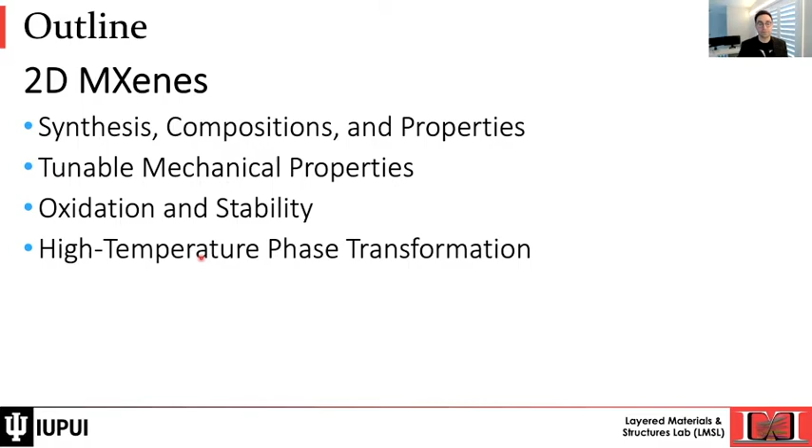And at the end, I will also talk about the high temperature phase transformation of MXene. Something that people say: well, if it gets oxidized at room temperature, how is it even possible to be stable at high temperatures? So first, let's start with MXene.

For those of you who do not know about 2D materials -- though I'm sure you're all familiar, being here in this webinar series -- 2D materials all started from graphene, and really the boom started in 2004 and after, and now we have a whole bunch of different families of 2D materials. One of these families of 2D materials is called MXenes.

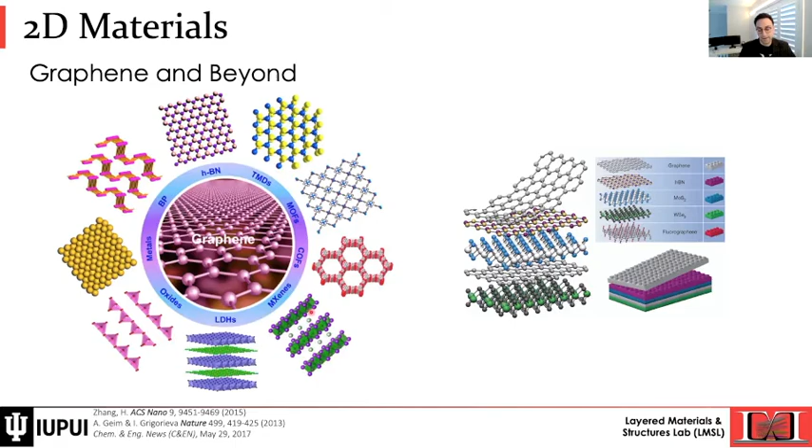MXenes are 2D transition metal carbides and nitrides. If you look at the periodic table of MXene, you see that we have all the early transition metals, group 3 to 6 of the periodic table, marked as green. These are the transition metals that can be in the structure of MXene.

We can have 2, 3, 4, or 5 layers of the transition metal atomic layers, and they all have carbon or nitrogen -- that's the X in MXene -- between these layers of transition metals. Because we have transition metals on the surface, we have dangling bonds that can bond to species available in the environment, forming surface termination, shown as Tx in the MXene formula. Usually these are oxygen, hydroxyl, or fluorine and chlorine because of the etching environment, and more recently you can have more variety of surface terminations.

This is how MXenes are synthesized. They are done by top-down synthesis, so it's not a growth mechanism.

First, we need to synthesize the precursor of MXene, usually called MAX phases, which are ternary carbides and nitrides, where we have these 2D layers bonded with a layer of A group elements, such as aluminum, silicon, and others. Because aluminum, silicon, and these A elements form a metallic bond, we cannot do mechanical exfoliation. That's why we need to do selective etching, and I will explain how. By doing that, we can make MXene.

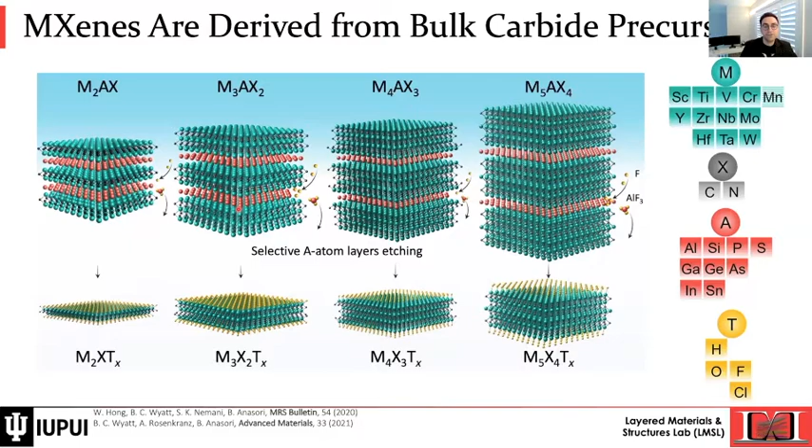So first, how do we make these precursors? The synthesis is important because the way you synthesize the precursor will affect the quality of MXene. I'm going to focus on Ti3AlC2, the precursor of the well-known MXene Ti3C2Tx. To synthesize it, all we need to do is combine the required stoichiometric molar ratio of 3 titanium, 1 aluminum, and 2 carbon as elemental powders you can buy from any chemical company. Then you mix it and put it into a furnace under controlled environment, meaning inert gas at atmospheric pressure, and take it to a high temperature where this phase is known to be thermodynamically stable, and hold it—for example, 1400°C for 2 hours. By doing that, you get this structure by reactive sintering of the three elements.

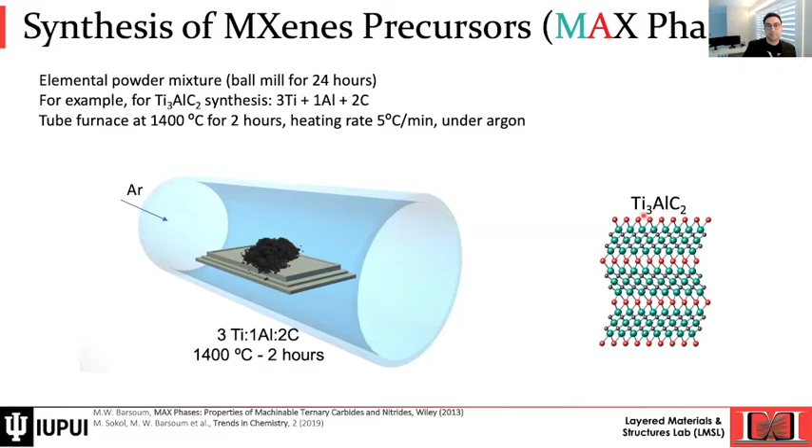These are all layered ternary carbides and nitrides. There are more than 100 max phases that have been synthesized, with a large variety of composition—more than thousands of compositions across all these different layerings of the structures.

When we have these max phases, we place them in a selective etchant—something that has started in 2011 and continued since then—usually a hydrofluoric acid containing solution. The hydrofluoric acid will selectively remove the A layer, which is aluminum here. So we put just the powder—you see it's a gray powder of carbide—and place it into the acid.

And this is how the max phase looks like. This is a high resolution STEM image showing the layered structure, but not yet 2D. By removing the A layers, we end up with this exfoliated structure, and you see we have an open structure between the layers, now bonded by van der Waals bonds or hydrogen bonds.

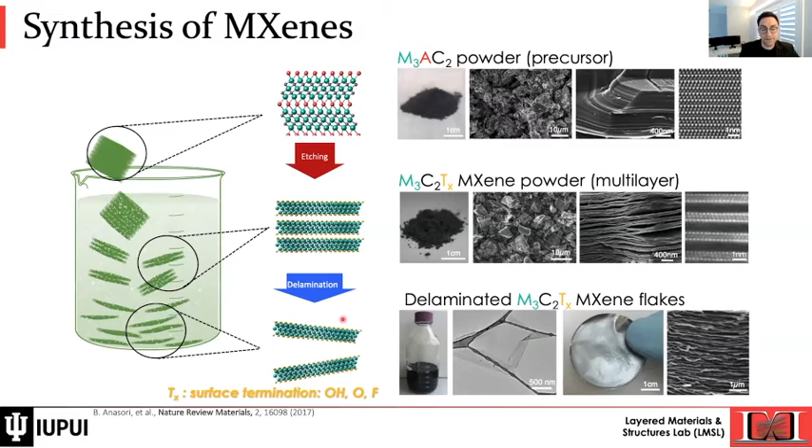Then by mechanical agitation, sonication, we can break these flakes into single flakes and have MXene solutions.

MXenes are among the few in the 2D world that can be scaled up, and that's very important because the synthesis is a top-down method, not a growth mechanism. By just making the reactor container larger and having more starting precursor mass, we can make a larger quantity of MXene film, solution, or powder. And they behave like a clay, so water or other cations can easily integrate into the MXene structure.

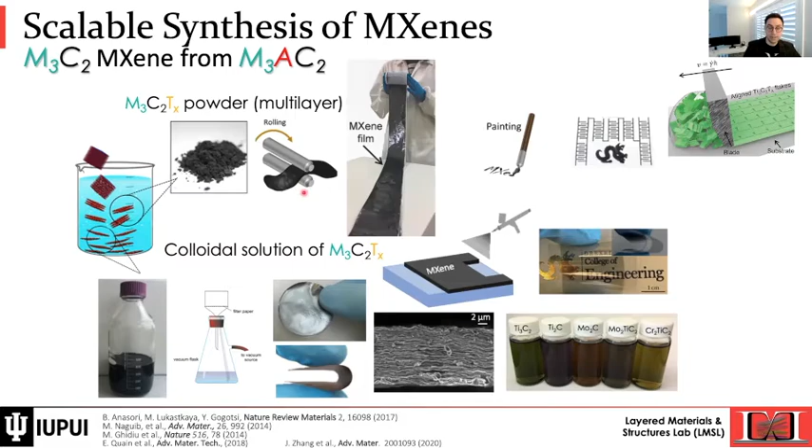So just to wrap up the MXene synthesis and properties: these are basically metallic 2D materials. MXenes have high electrical conductivity—for example, for Ti3C2 film, it has up to 24,000 Siemens per centimeter. They have other unique properties that I'm not going to talk about due to time, but you're welcome to read the papers, or listen to Professor Yury Gogotsi's webinar on MXenes, where he explains all of this very well.

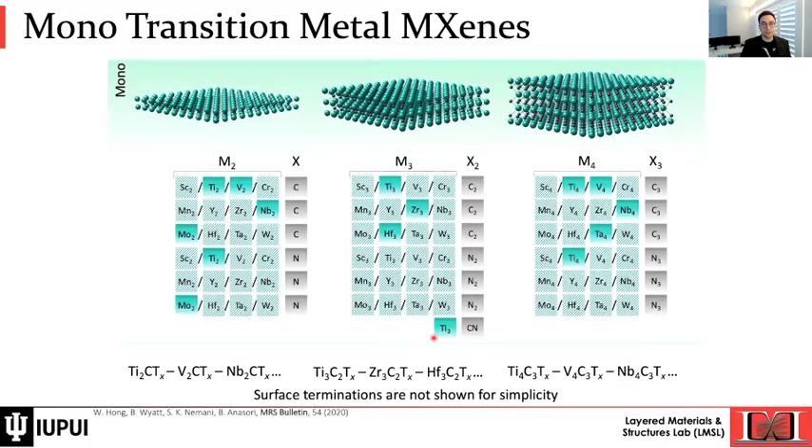Now, MXenes are not just Ti3C2—they can have a variety of compositions. For example, we can have vanadium carbide or niobium carbide, which is important when tuning mechanical properties. We can also have two different transition metals combined, called double transition metal MXenes—for example, titanium and vanadium mixed together as a solid solution. So we can have different solid solutions: titanium vanadium in a 3-layer, titanium vanadium carbide in a 2-layer, or titanium niobium in a 4-layer, and so forth.

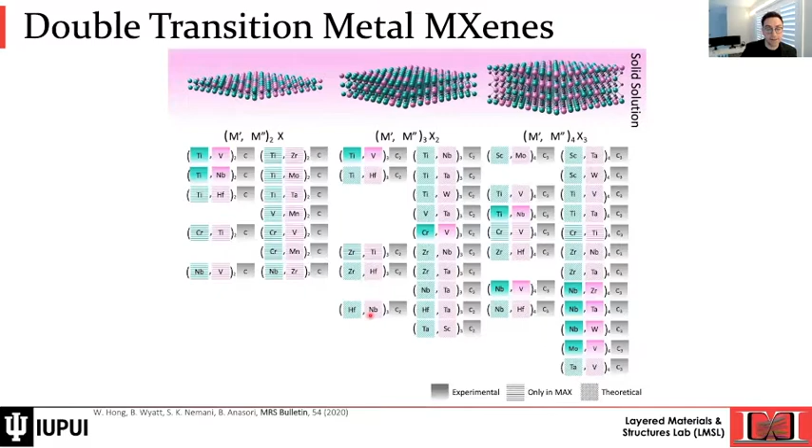A unique feature of the MXene family is that when we mix certain transition metals, such as molybdenum and titanium, or molybdenum and scandium, instead of forming a solid solution as I showed in the previous slide, these prefer to have an ordered structure.

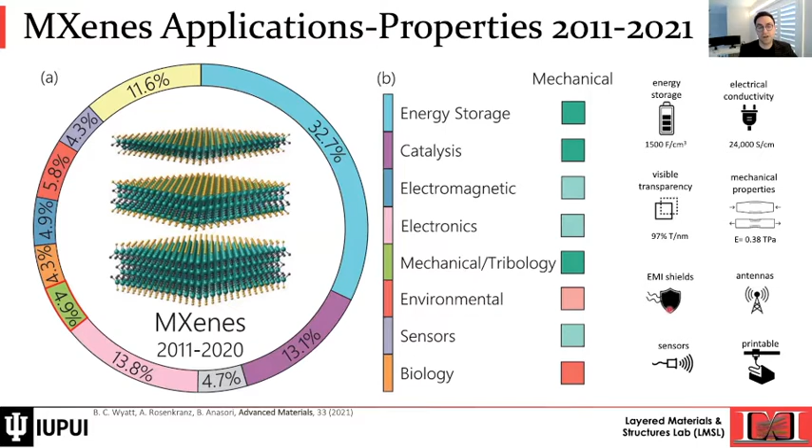And that 5% is not really papers dedicated directly to mechanical properties. We included those that just investigated the mechanical properties of MXene, and they have, as I mentioned, unique properties I'm not going to talk about. So let's move to tunable mechanical properties of MXenes.

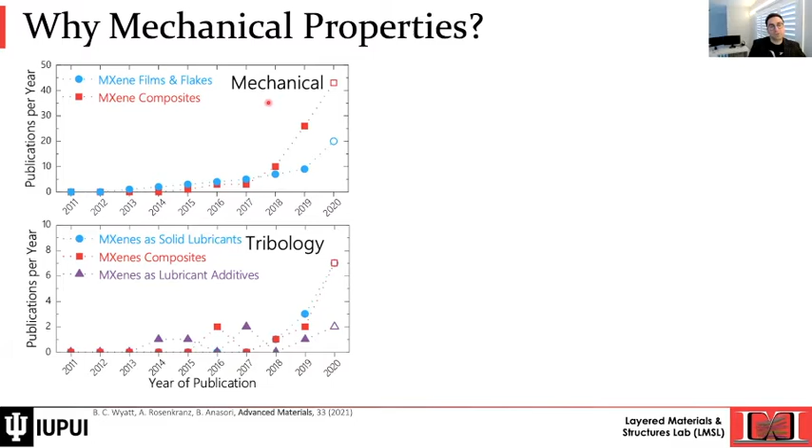Also a big contribution coming from Professor Andreas and his group. Now you might ask, why should we care about mechanical properties? There's only little done on MXenes. As I mentioned, mechanical properties and oxidation and stability are essential for any application of MXenes. So here we just mark the importance of mechanical and tribology properties of MXenes with respect to every application of MXenes being explored.

Obviously we are making a structure, so mechanical properties are important. When you see it is red, it means we think it doesn't have that much importance for that application, and when green, it means they are very important, mechanical and tribology. The rationale behind our analysis is included in the supporting information of this review paper, so you can read it to understand how we came up with this color coding of green and red in terms of importance. So mechanical and tribology properties of MXenes are very important.

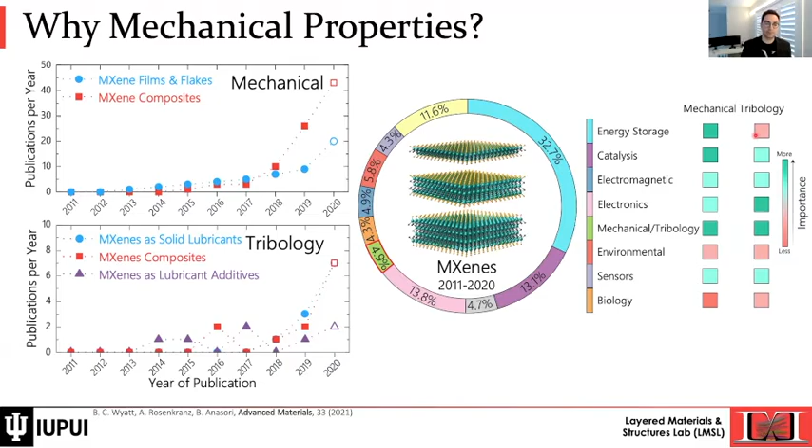Now, how much do we know about the mechanical properties of MXenes? We only know 2D stiffness and also elastic moduli of 2 MXenes only: niobium 4C3 and titanium 3C2. For these two MXenes, the elastic modulus from their 2D modulus was measured, both done from University of Nebraska in collaboration with Drexel University, by AFM indentation, atomic force microscopy. The 2D modulus was measured, and based on the thickness of MXene, the elastic modulus was calculated.

You can see that we are in the 300 to 400 gigapascal range. Now, if you put it into perspective with respect to all 2D materials, MXenes are maybe the 4th or 5th of 2D materials. But if you look at the synthesis route, which is very important, if you look at highly scalable processes, MXenes are the stiffest of solution-based 2D materials, meaning materials you can make by solution processing. So they are the strongest or stiffest of all solution-processed 2D nanomaterials.

Now, what are the key parameters that control mechanical properties of MXenes? Number one, the composition of MXene. As I mentioned, we have a variety of different compositions that we can go from: titanium, vanadium, chromium, yttrium, niobium, molybdenum, all these transition metals. And X is carbon or nitrogen.

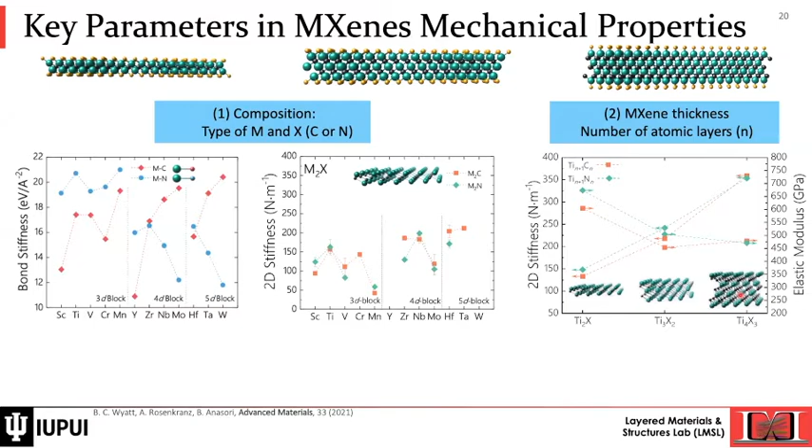Now, you might say, well, usually we're using the hydrofluoric acid route or the HCl/LiF hydrochloric acid lithium fluoride routes, so we don't have control over surface termination. I want to emphasize that we can control the composition, the ratio of surface termination, just by playing with what type of etching route we go.

This is from a study published in 2016 that showed if we use hydrochloric acid with lithium fluoride, which has a lower concentration of HF, we'll have more oxygen on the surface, versus when we use a higher concentration of just HF, hydrofluoric acid, we'll have more fluorine and less oxygen. So just by adjusting the etching solution composition, we can tune to some degree the surface termination.

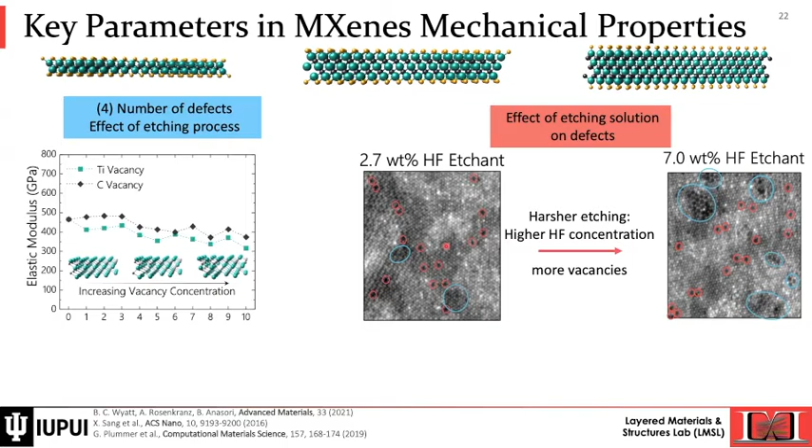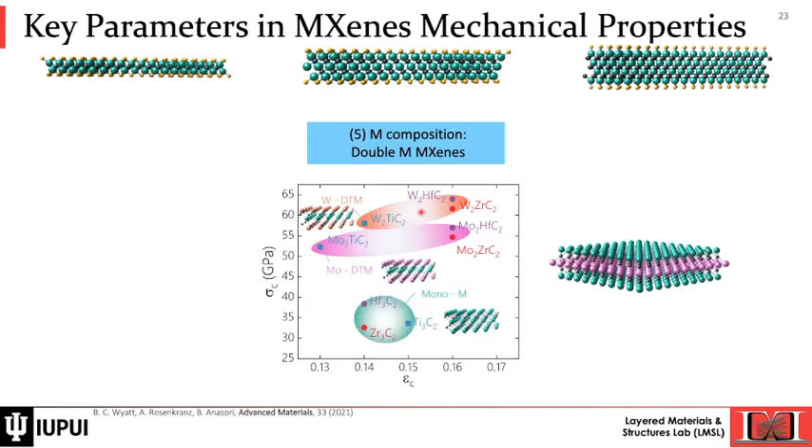Now, these are about a single flake of MXene. You might say, well, single flake is nice, but we work with large quantities of MXene. We make a film. For making the film, all of these variables that I mentioned apply, plus it also depends on how you prepare your MXene film or structure, because these are individual flakes. But if we work at the larger scale, which is usually the level we need, we're not working with just a 1 nanometer flake, we have a stack of these flakes. Then we talk about how we order these layers together.

Here's a nice study published in 2020 that showed how you prepare your MXene film, whether it is blade coating that leads to better alignment of the flakes, versus vacuum filtration. If you use high concentration in vacuum filtration, then the film will be less aligned. The MXene flakes will be less aligned. That will significantly change the resulting MXene properties, for example, tensile strength.

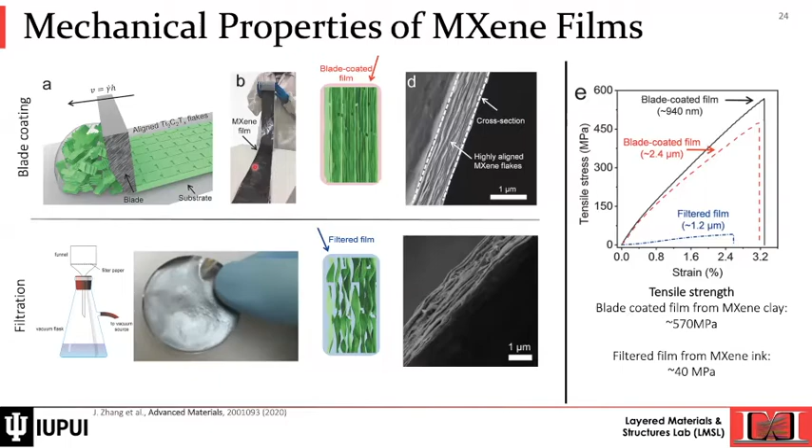So to wrap up this section of my talk, MXene mechanical properties are tunable, and we have several knobs to play with to control them. It can be how we synthesize the precursor, how we synthesize the MXene with different etchants, the number of defects, even the nature of the A group elements we synthesize, surface termination, thickness — all of that will lead to tunable mechanical properties and tunable tribology properties.

As I mentioned, this was more of a review, so you can find all the references in our review paper that I mentioned as a reference in this slide.

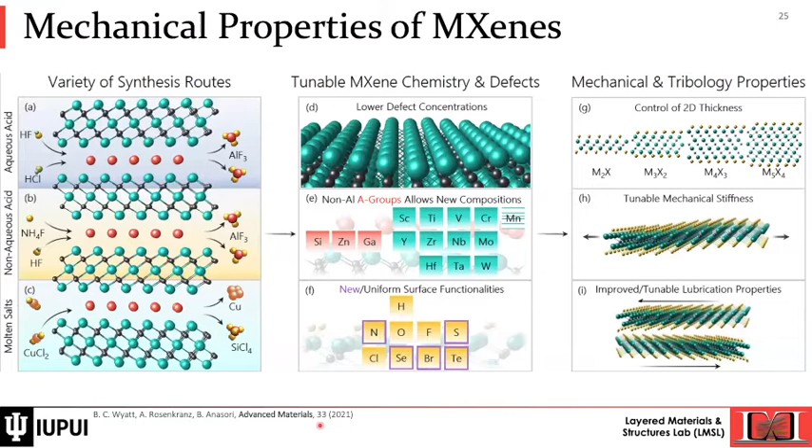Moving forward, MXene oxidation and stability. As I mentioned, mechanical and tribology properties are one thing for all applications, but stability of MXene is essential for any application that you want to claim you are using MXene for. Anyone who works with MXene knows that when we synthesize it in aqueous solution, it gets oxidized rapidly. So it is important to prevent or slow down oxidation. Otherwise, the material we are characterizing is oxides, not carbides.

Before I talk about MXene oxidation, I want to emphasize, as general knowledge, that the stability of any phase depends on many parameters: its composition, number of defects, environment, temperature, atmosphere, and many more variables. Also, bulk carbides get oxidized too. So it is not only MXene that gets oxidized. This is something I want everyone to understand.

For example, titanium carbide is known to be extremely stable. But there are studies, maybe very few, that show that even TiC at room temperature in water can form oxides up to a few atomic layers. That's why the general knowledge about TiC and other carbides is that they are stable at room temperature or in water. But the reason for that is, before the 2D materials era, we were looking at bulk materials, and no one really cared about 2 or 3 layers of atoms. That's why they were called highly stable.

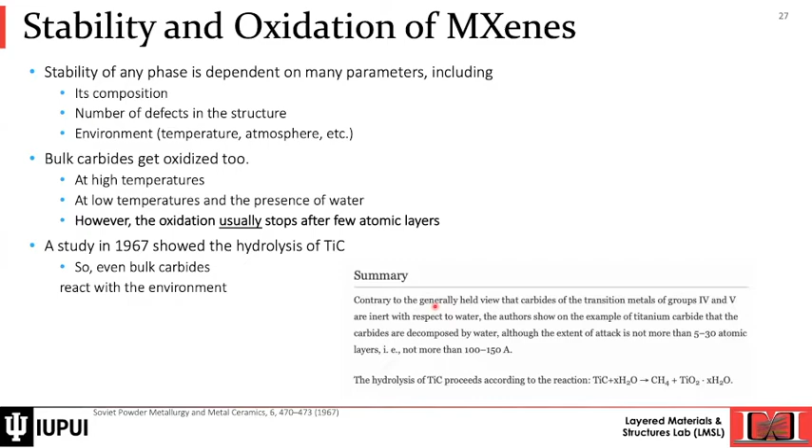For this part of my talk, I am going to go over many of these extremely useful papers that I put here, and I will mention them as my references. None of these were done in my group — these are all done in other research groups at different universities, but I found them very useful when looking at MXene oxidation and stability.

So first, when we put MXene in water, which is how we synthesize MXene, it usually reacts with water and turns into TiO2 and also methane.

This is really the result of the great work of Professor Vadim Mochalin of Missouri Science and Technology, who explained how this phase transformation happens. Here we show basically a synthesized MXene film, and after aging 5 weeks in water in a refrigerator at 5 degrees Celsius, and 10 weeks. You can see after 5 to 10 weeks, almost everything turns to TiO2. Here's a schematic that I got again from Professor Mochalin's paper showing that MXene goes from MXene flakes to TiO2, almost all TiO2, maybe some carbon covered around it.

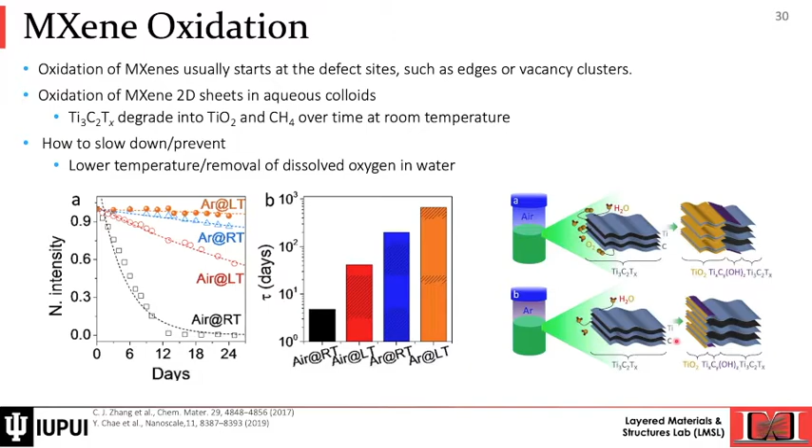The next way to protect MXene is to freeze the MXene aqueous solution. This is another study published in 2019 that clearly showed that if you store MXene solution frozen, either in a regular freezer at minus 18 to 20 degrees Celsius, or in a minus 80 degrees Celsius freezer, you can keep MXene almost stable up to 5 weeks or 10 weeks. Here you see the MXene in the fridge at 5C, where almost everything turned to oxide. And here you can see that the ones kept in a freezer were both stable.

Also, another way is just to remove the water. If you remove the water, this study showed that if we disperse MXene in isopropanol, even with oxygen present, it's stable. Here you can see this is MXene in isopropanol with oxygen, that up to 30 days there is almost no change of properties. So that's another way to control MXene oxidation - change the solution from water to isopropanol.

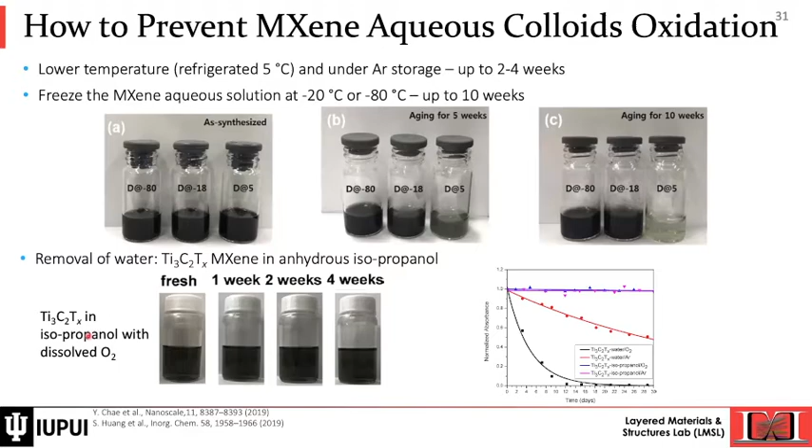There's another study from Drexel, from Professor Barsoum's group, that showed MXene oxidation starts from the edges, as we briefly mentioned previously - that's the defects area. So if we can protect the edges, then MXene oxidation will be prevented for a longer time. Here you can see this is a MXene flake in TEM after storage, where you can see all these black dots are oxide nanocrystals forming.

And here's the one that was capped. Edge capping with, for example, only 0.1 molar of polyphosphates, will attach to the edges of MXene and stop the MXene oxidation. This is MXene after storage with edge capping, showing no oxidation.

The other method came out from Drexel, from Professor Yury Gogotsi's group, who showed that if we modify the MXene precursor synthesis route, we can significantly improve the stability of MXene Ti3C2, up to 10 months. The way they modified it is very clever and simple: if you change the stoichiometric ratio of 3 titanium to 1 aluminum, 2 carbon, and add twice the moles of aluminum as needed, the precursor will have fewer defects in the structure, and fewer defects in the precursor means fewer defects in the structure of MXene, increasing its shelf life.

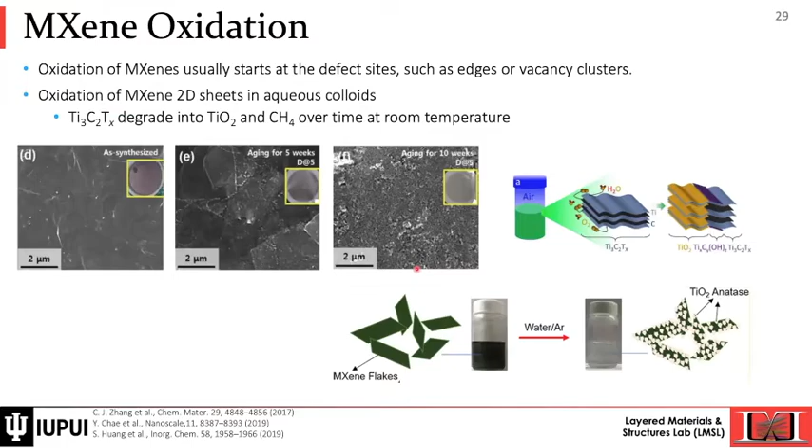You can see this is something expected after a few days of regular MXene, and this is what happens if you use the excess aluminum route. So a clever way to modify the precursor, something that almost no one expected to happen, but it's really working very well.

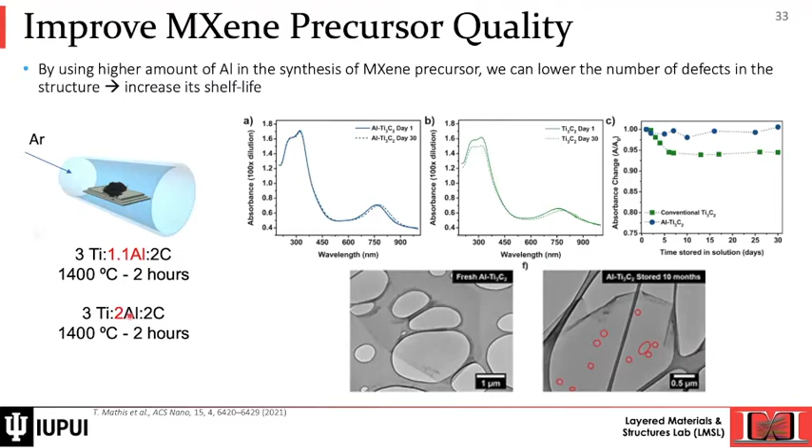Now, all of these that I mentioned were all about Ti3C2 stability. If we work with other MXenes, because they have smaller flakes, more defects, and we have not really mastered the synthesis route of other MXenes, they're more defective, and some of them are thinner, which means they will be oxidizing even faster.

Here's a Ti2C. After 1 day in colloidal solution, it is gone, oxidized and gone.

Here's a V2C AFM that you see that after storage, the flakes will turn to oxide. So here is the MXene flakes, and here you do not see the MXene flakes because they're all covered with oxides and turn to oxides.

Here's the MXene film, and these are again the result of work from Professor Beidaghi's group at Auburn University, that showed the fresh MXene film.

V2C, even if you keep it in film, let alone the solution, after 1 month of a MXene film, it will oxidize so much that the film will deform, something that you do not see with Ti3C2. So some MXenes, such as these, are even unstable in a dry form.

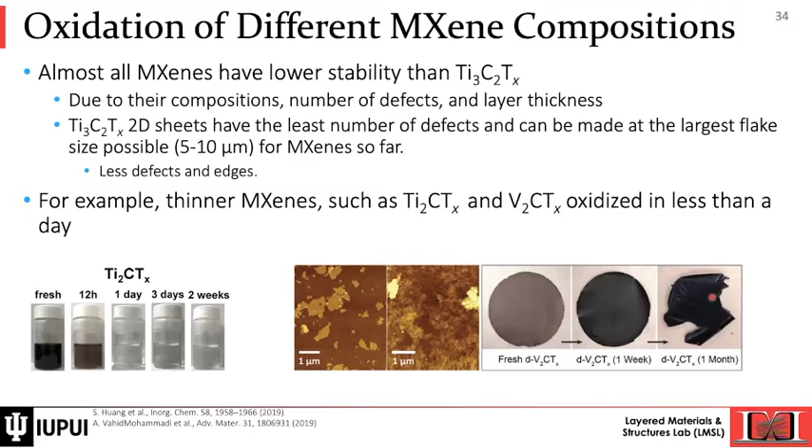How can we prevent these? A method that first started from Auburn University of Professor Beidaghi, and now also a recent study coming from Drexel University, Professor Yuri Gogotsi, showed that by addition of lithium chloride salt to MXene solution, even if it is V2C, the least stable MXene, we can create flocculation, and that will lead to improving the stability of MXene.

So these are the methods that I just wanted to summarize for everyone, that we can control MXene oxidation, whether it is removal of oxygen, change of solution, or modifying the synthesis route, or addition of different salts by edge capping or by creating flocculation.

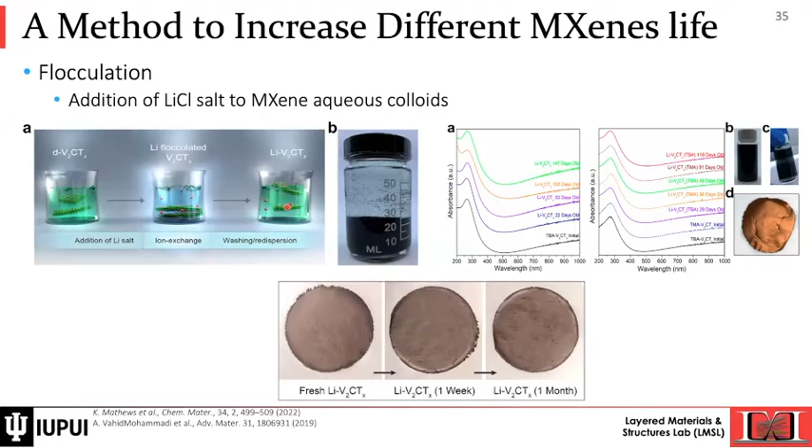Now, moving to the last part, and I'm going to be very fast on this part because it is not relevant to the topic of tribology, but it is important to emphasize that MXenes behave like almost every carbide. We just talked about MXene getting oxidized by just a few days of storage in air. Now I'm going to shift gears and talk about how MXenes can be used to make ultra high temperature, not even high temperature, phases. So how do we do that?

First of all, if we heat treat MXene, if you want to go to high temperature for every material, if you want to avoid oxidation, you need to use an inert atmosphere or vacuum. Now, if we run it under inert atmosphere and vacuum, we can remove the surface termination. We can gradually, up to 700 or 800 degrees Celsius for Ti3C2, remove the OH, fluorine, and oxygen from the surface of MXene.

Then it becomes a titanium carbide phase diagram structure, and we are in the non-stoichiometric phase diagram. So now we can use MXene as a precursor to design novel structures that is traditionally impossible to make for high temperature materials.

The first study of the phase transformation was done in 2018 from Oak Ridge National Lab with collaboration with Drexel University. It was shown that when we heat treat MXene Ti3C2 at 500 C in situ STEM in vacuum, we have homoepitaxial growth of MXene, meaning that we'll have layers of titanium carbide forming over a MXene and making it thicker and thicker.

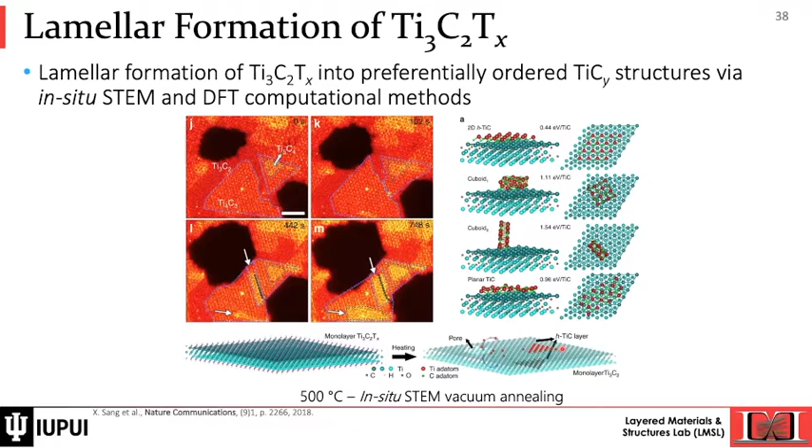So it is basically the 1-1-1 plane, but forming these thicker layers that are basically what we call hexagonal TiC, because they're off of the basal plane of MXene. So there is really no oxidation when we remove oxygen, obviously, and we can create carbides.

Now, in a nutshell, if I want to explain what happens to MXene when we take it to higher temperatures, when we take it to 1000 C, and this is a study that we did at Drexel when I was at Professor Yuri's group, we see that we have this layer structure at 1000 C. And when we go to even higher temperatures, we create TiC, titanium carbide.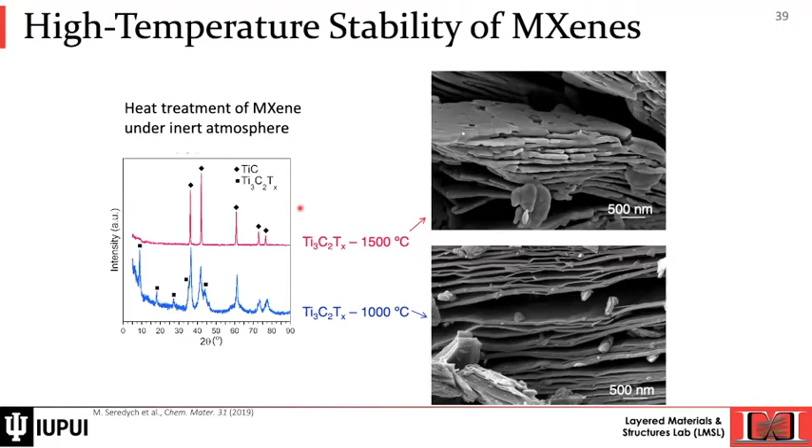Now, the titanium carbide, so there is no oxide, there is no TiO2, we form titanium carbide. Now, the titanium carbide that we synthesize has high texture.

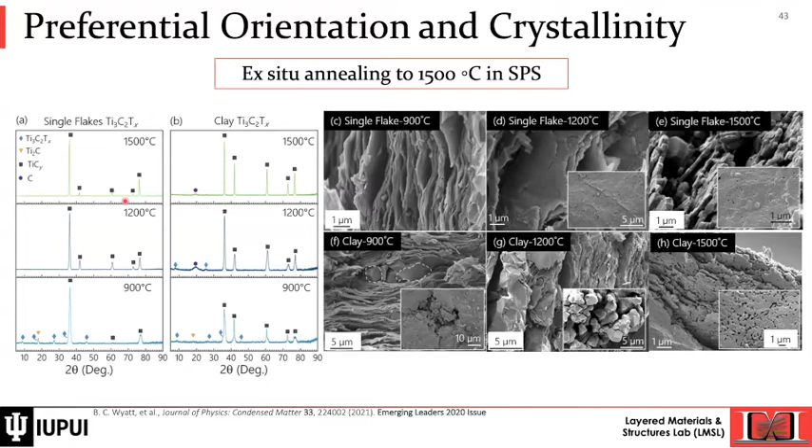I'm going to skip through this and bring it to here. If we take it higher, even to 1500°C, the titanium carbide we form is highly textured, meaning we only see the 1-1-1 plane of TiC in the X-ray diffraction, because they're growing off the basal plane of the hexagonal structure, which is identical to the 1-1-1 plane of TiC. That's why these diffraction peaks are a lot stronger, which is not something you see in regular TiC. So by using MXene as a precursor, we can design carbides and ultra-high temperature materials with a unique morphology and texture that's impossible to achieve through the regular route of making these carbides.

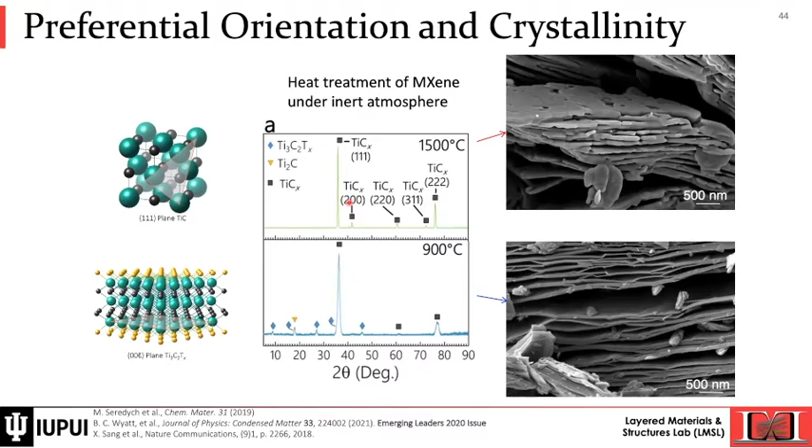I hope I was able to explain the four aspects of my talk today: MXene synthesis and composition and the variety of different synthesis and compositions, the stability of MXene and phase transformation at higher temperatures, and the tunable mechanical properties of MXene. These last two are essential—mechanical properties, tribology, and oxidation are essential for any application of MXene.

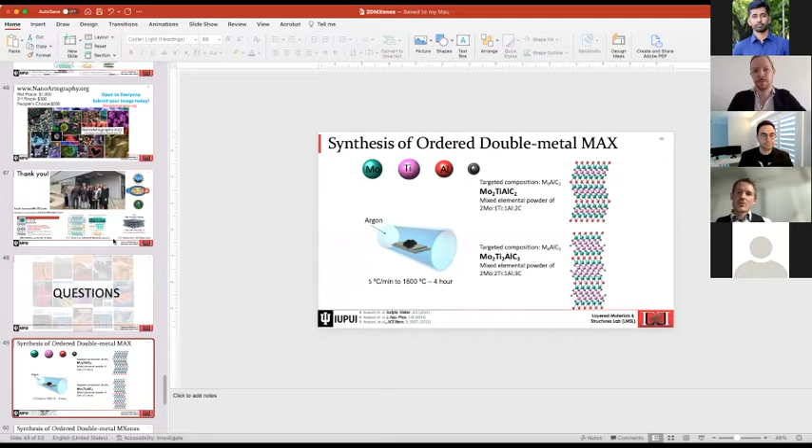Thank you very much, Babak, for the very comprehensive overview, especially about mechanical properties of MXenes and oxidation stability—both aspects which are also very important for tribological properties. I think especially for people giving hints on what one has to pay attention to when handling MXenes, that's very helpful.

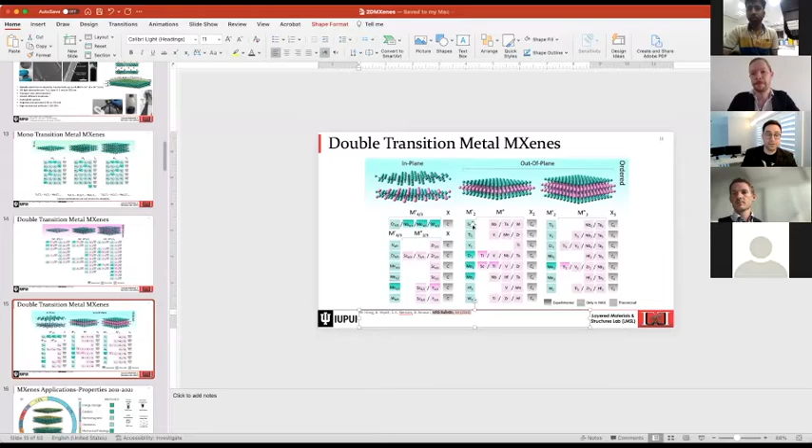We can also modify the surface termination, and that is something that, until 2020, we had no direct method of forming a uniform surface termination. But as I mentioned, by the work of Professor Dmitri Talapin from the University of Chicago, using molten salt, now we can form uniform surface termination, and that can lead to having MXenes with semiconductive behavior. I invite you to read this review paper that I published in MRS Bulletin, where we discuss how we can modify the surface termination. There are many more papers too. You can also read the latest review paper published by Professor Yuri Gogotsi at Drexel, published in Science, to learn more about tuning the electronic properties of MXene.

Thank you. Thank you for the detailed answer. Yes.

Next question is, how will MXene perform against bacteria with higher activity than other materials? That's another area of MXene, and there are studies published on the antibacterial behavior of MXene. There are review papers showing that yes, they are effective for antibacterial usage, and there are some proposed mechanisms of how MXene damages bacterial DNA. I invite you to read more. I'm looking for a reference to give you. Probably the latest review paper, again published in Science, will have some of this, or simply Google Scholar 'MXene antibacterial,' and you'll find a lot of information in many reviews and research papers that were published. Yeah, for sure, there's a lot.

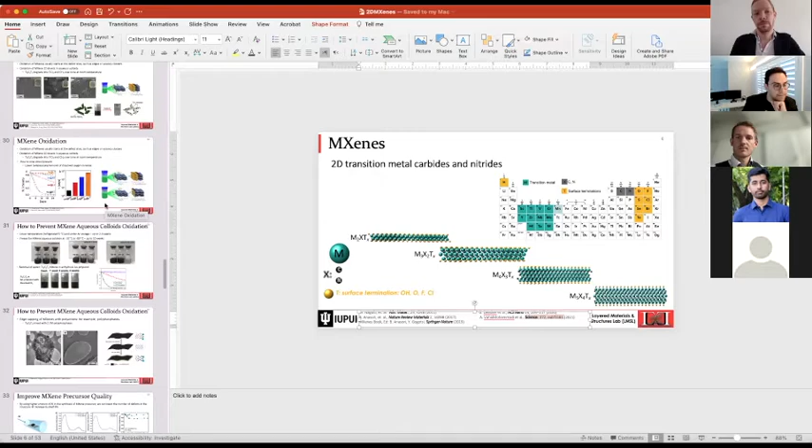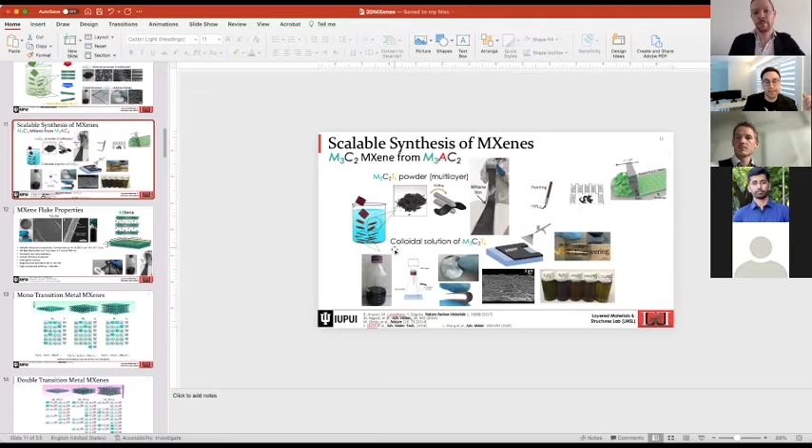Another application-based question is, what is the potential of MXenes in water absorption? Let me find a slide that can explain this. Depending on the synthesis route of MXene, for example when we use the HCl-LiF method, we create MXene clay, meaning they can accommodate up to a few layers, three layers of water molecules in between the layers. That is basically water absorption, meaning that if you put it in water, it swells to a larger volume because it can have up to three more layers of water molecules in between the layers. So they can easily absorb water in between the layers, not on the surface. That's why it's so effective when you use MXene clay powder to absorb water, rather than just onto the surface of MXene.

Yeah, this wasn't so application-based. At the beginning I thought it was about water desalination, but right, so water desalination and water membranes in general is another application I invite everyone interested to read review papers or research articles about, regarding water desalination and MXene. 'Water membrane' would be a good keyword to search and identify a series of different papers where they can find their answers.

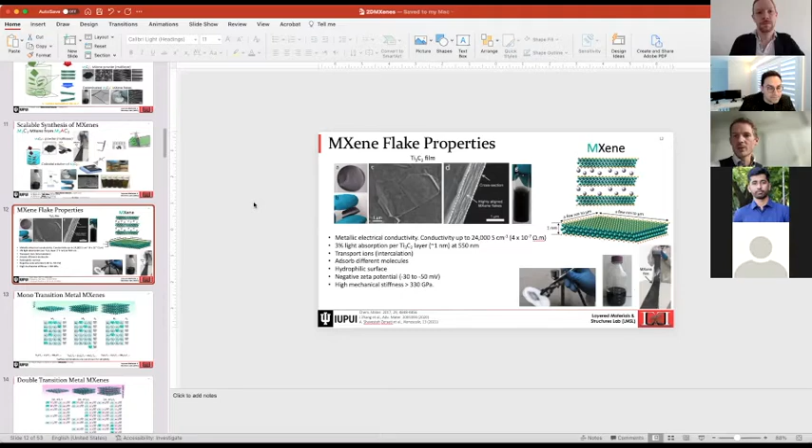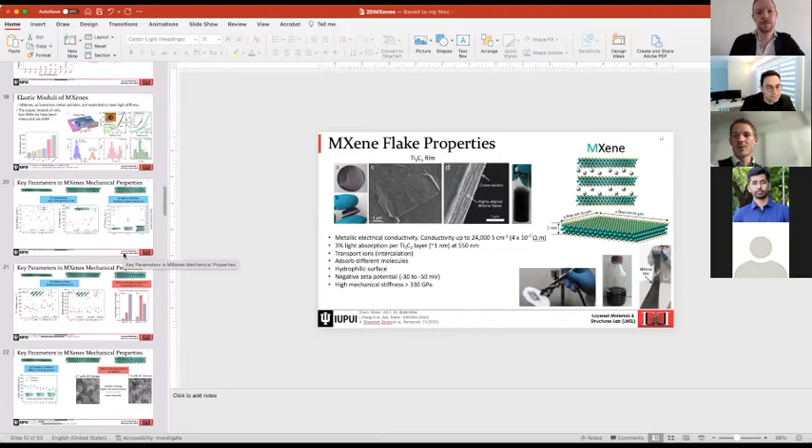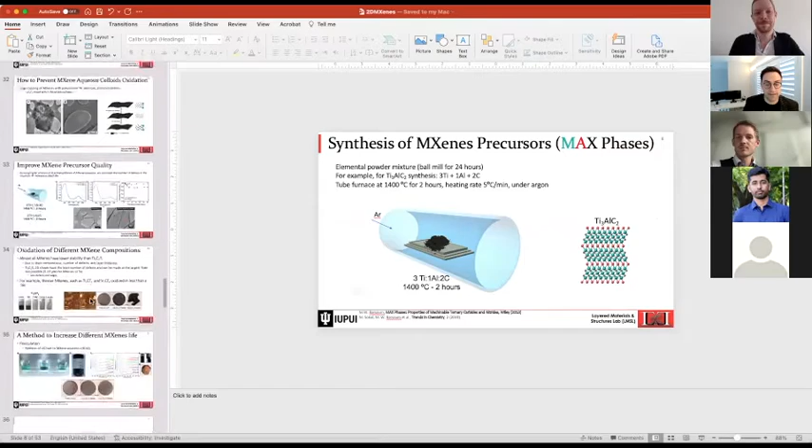Another basic synthesis question: someone wants to know the need to add aluminum and/or silicon to the starting materials during synthesis if they will have to be etched out afterwards. That's a great question. If you just put titanium and carbon together, as I mentioned at the end of my talk, we form titanium carbide, and titanium carbide is a cubic structure, so it is not a layered structure. Of course you can argue this is layered, right, because the 1-1-1 plane of FCC is layered, but the distance between the layers are all similar. So there's really little known, if any, about how we can break these into single flakes. That's why we need a layered structure.

To make the layered structure, we need a different precursor than titanium carbide. That different precursor is these layered ternary carbides, called MAX phases. We are not simply adding aluminum and leaching it out. We are adding aluminum to create a structure that is impossible to make just using the transition metal and carbon. By adding aluminum, we synthesize a new phase. It is not a regular carbide, it's a ternary carbide, a family of carbides.

As I said, there's a textbook about it you can read. Now, when we form this layered structure, by leaching out the aluminum or silicon, we can keep the 2D or layer structure that leads to MXene.

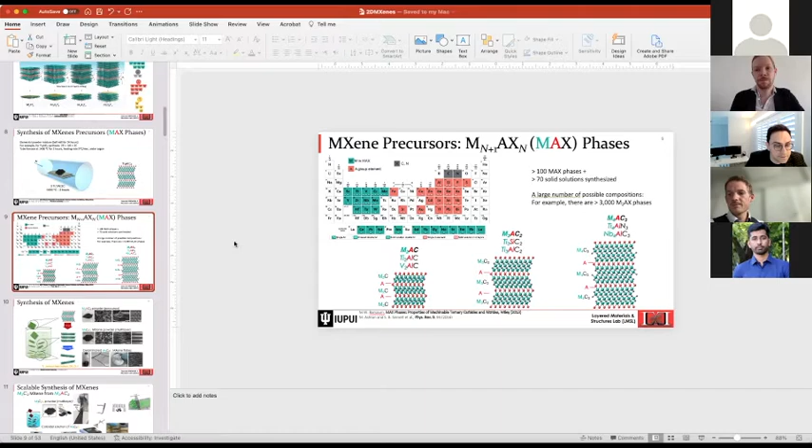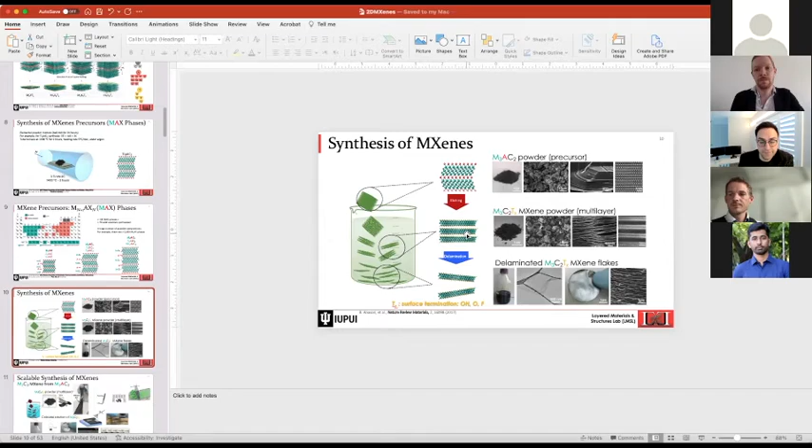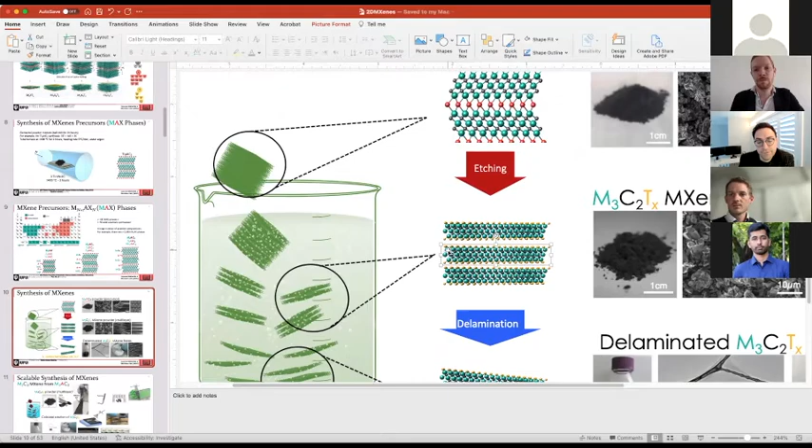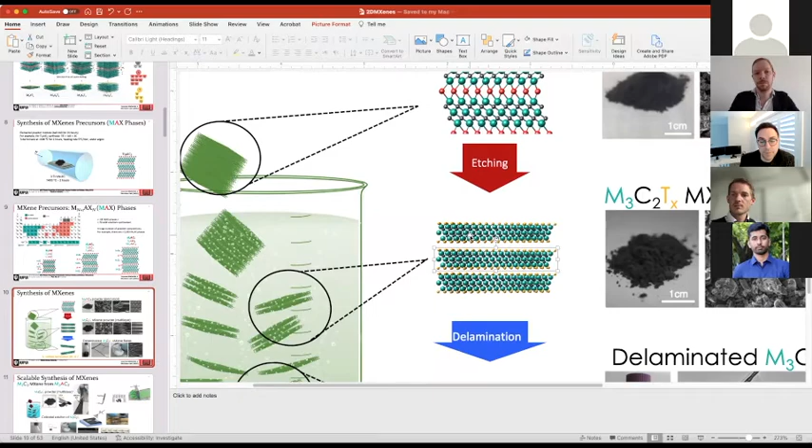Does it not affect the bonding of the material? When we leach out the aluminum, the surface titanium, for example, becomes available to bond. The leaching out usually happens by fluorine ions attacking the aluminum, and then fluorine and oxygen will also attach to the surface transition metal, creating the surface terminations. These will now have bonding, but not primary metallic bonding anymore — they'll have secondary bonding, van der Waals or hydrogen bonding if we have OH on the surface. But through this surface termination bonding, the layers still form one powder structure. So they don't really repel and separate just by leaching out.

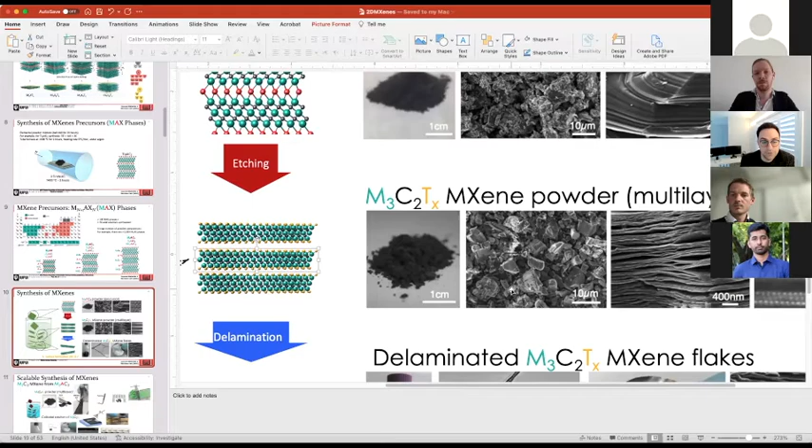I hope that answered your question. Trying to understand — yes, sure.

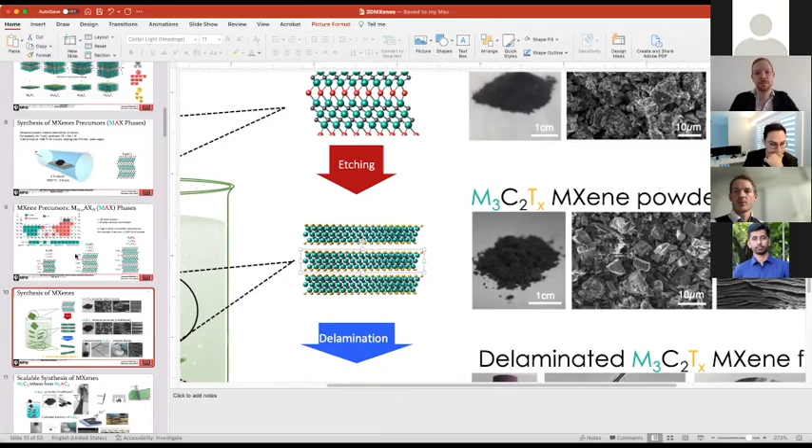Then there's a question about the synthesis route: could you give at least one environmentally friendly synthesis of MXenes? Yes, there are now new methods emerging. By environmentally friendly, I think they mean avoiding hydrofluoric acid. There are new methods emerging. As I mentioned, I didn't discuss the molten salt method, but that's a new emerging area, although molten salt was something we used before to make the first titanium nitride MXene, Ti4N3.

But to the extent that we now have better understanding and control of synthesis, molten salt is something that in the past 2 to 3 years has been used to make novel MXenes with uniform surface termination. You combine different salts and form a eutectic at lower temperature, melting at 500°C, which can lead to exfoliation from MAX to MXene using molten salt. Electrochemical etching is another method that avoids hydrofluoric acid — using HCl, hydrochloric acid, we can also synthesize MXene. So there are different routes of synthesis.

And more are coming almost every few years, which are basically HF-free. By environmentally friendly, I think that just means avoidance of HF. But in general, all of these will have byproducts, and I believe that for any scale-up, if a material is moving to industry, we need to think about how to handle the byproducts or waste — not simply treat them as waste, but as byproducts. For example, when we have HF, we can treat the waste so that we have a sustainable method of synthesis.

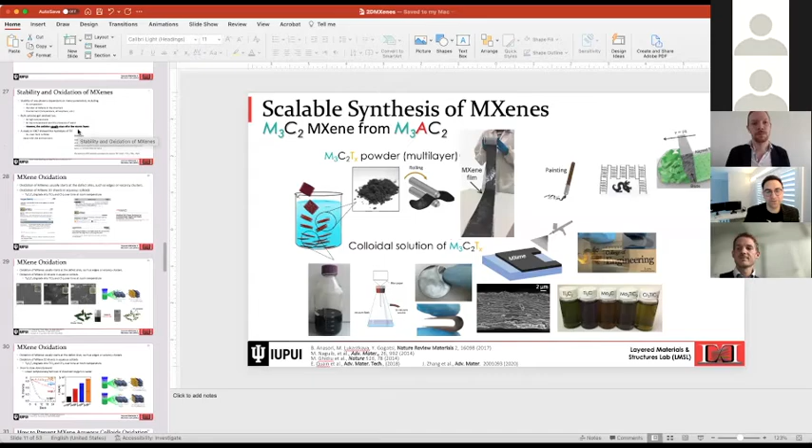As I usually like to mention, everything gets oxidized, including us. Even the highest stable carbides, titanium carbide, molybdenum carbide, or all the heating elements we work with in the furnaces in our labs, they all oxidize. The stability of these high temperature phases depends on how thick an oxide scale forms around them to protect and prevent further oxidation.

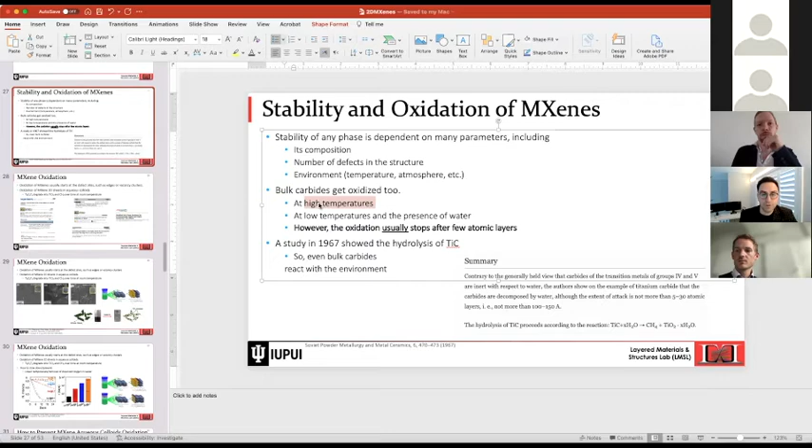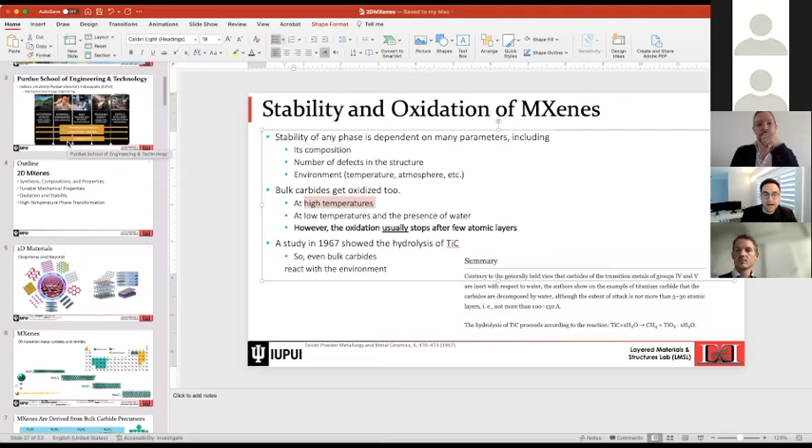Certain MAX phases, such as the aluminum-containing Ti2AlC, are known to be stable in terms of oxidation up to 1200 degrees C because they form a protective oxide scale as a bulk. Obviously, if you do it as powder, the oxidation will be a lot faster, and that can happen even at lower temperatures such as 500, 600 degrees Celsius. If you're interested in the oxidation of MAX phases, you can read the MAX book or many papers by Professor Michel Barsoum, who previously looked at oxidation of MAX phases in different varieties at different temperatures.

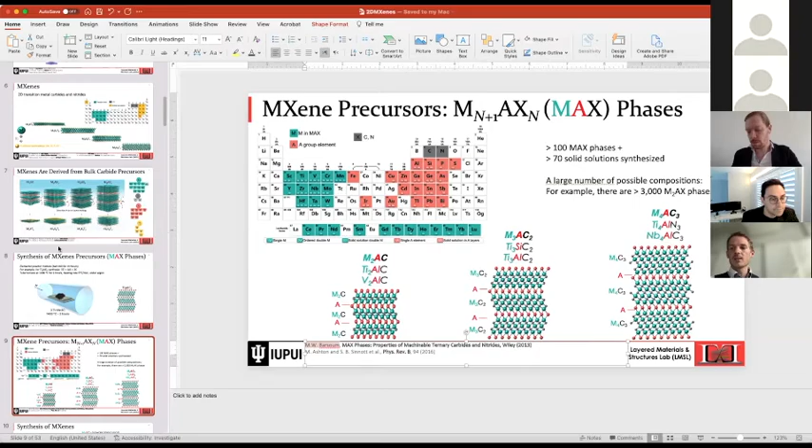Good. Then you showed that the oxidation stability is quite significantly increased when you use a molar ratio of 2 of the aluminum. And the next question is how or why the stability of this MXene is then improved.

The exact mechanism, I would say, is a novel study, so it's not fully known. But the best explanation based on the findings of this paper—and this is the only paper that reported the use of 2 aluminum—is that when we have excess aluminum, although we form impurities such as intermetallics, the structure of the MAX phase, because we have more aluminum and more titanium, will have less defects, less vacancy of titanium and carbon in the structure, because we know all of the carbides, including MAX phases or binary titanium carbides and others, are always non-stoichiometric.

First of all, they have less carbon than we always write. For example, if you order TiC and buy it from any chemical company, it is never exactly TiC. It is non-stoichiometric, basically TiCx, where x is usually 0.9 or lower, or higher like 0.95. So if we can design a method to make a MAX phase that has fewer of these defects, the vacancies, then we'll have higher stability.

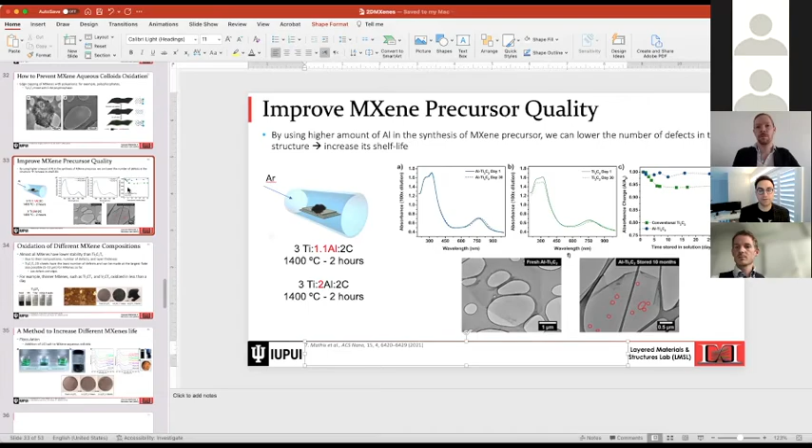For example, as I mentioned, the first nitride MXene, Ti4N3, was published in 2016 or 17, if I'm not mistaken, and that was published at Drexel. When I was at Drexel, we used molten salt, because every time we tried the regular etching with hydrofluoric acid containing etchant, everything would dissolve together and we would form a lot of oxides. So even forming the nitride, it would immediately turn into oxide. Stability is a major issue when designing all these carbides or nitrides.

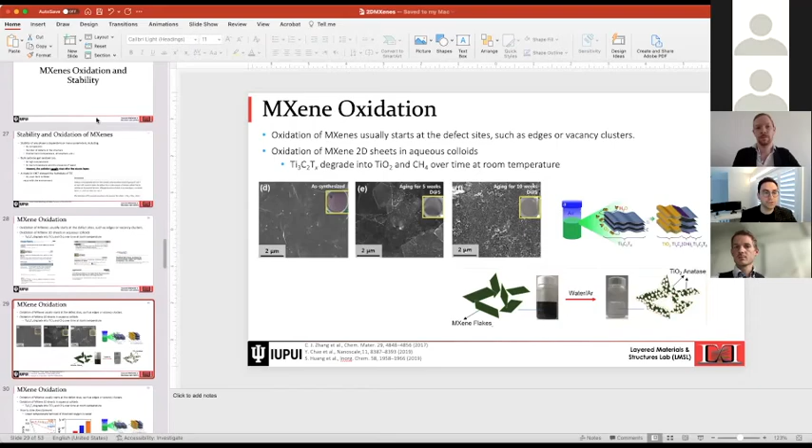And now with new methods of synthesis, such as molten salt, electrochemical etching, and others, I'm sure we can design more of the nitrides and investigate their properties. I believe that by having more variables in MXene, we can further tune the stability and mechanical properties for sure.

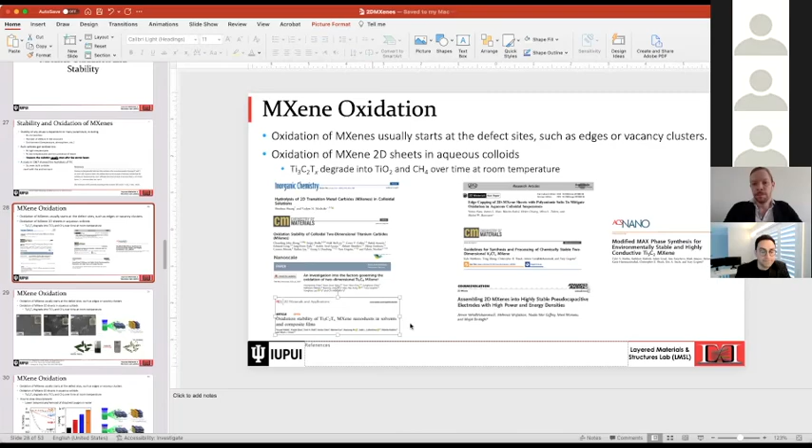Yes, definitely. That is one of the papers I listed here, on oxidation and stability, from Texas A&M, which I did not have time to go through. We can improve the stability of MXene by combining it with other nanomaterials or even putting it into polymers. When the desired application allows, we can include MXene into a polymer. In this study, they looked at PVA and showed that you can have improved stability by integrating it.

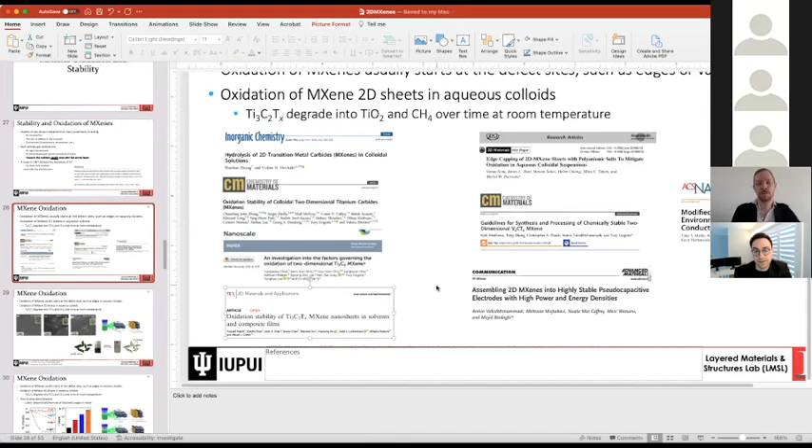So it's a matter of designing a composite, also with integration of nanomaterials. If they either prevent interaction of oxygen with the MXene flakes, or play the role of being sacrificial, then you can have a more stable MXene. I invite you to read this paper that covers MXene oxidation. These are not the only oxidation MXene papers, just the ones I used to put these slides together, since we don't have a review paper on this topic.

All right, last one up is Yasin. Do you hear us, Yasin? If not, then Felix also raised his hand. Hi, can you hear me?

Yes. Oh, thank you, thank you Professor Babak for your wonderful presentation. At some point I lost connection and I just returned. I had left some questions in the chat, I don't know if they've been responded to. Sorry.

Yes, we had discussed your questions, so we invite you to check the video afterwards that we're going to upload on YouTube, and you'll find Babak's answers to your questions there. Okay, thank you very much.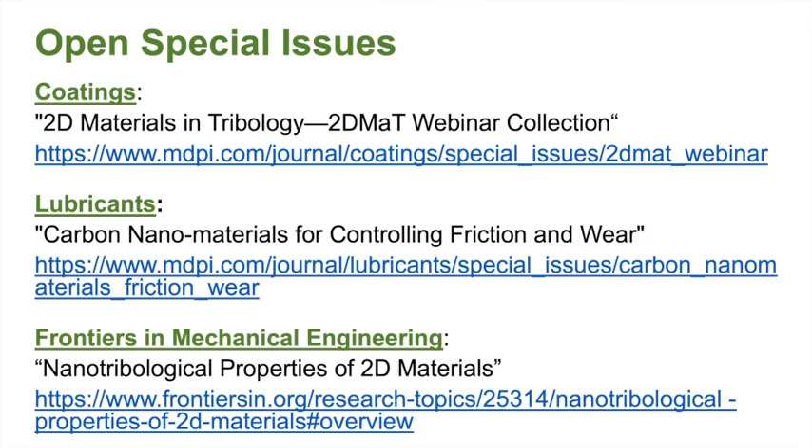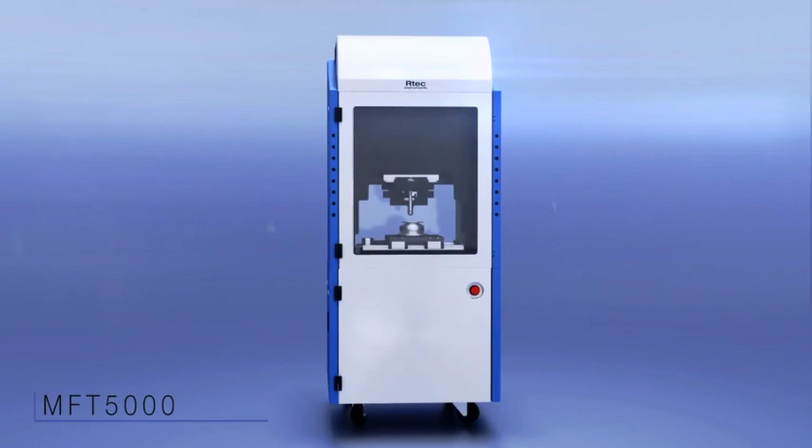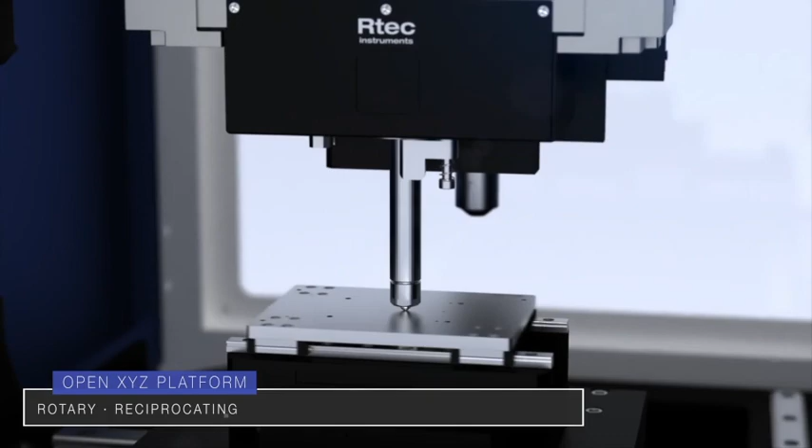Introducing the most advanced universal tribometer, the MFT 5000. With a modular architecture platform design, it is a robust surface testing instrument engineered to evaluate friction, wear, and mechanical properties of materials, as well as lubricants over time. The MFT 5000's open XYZ stages and wide range of interchangeable modules and sensors allow users to self-implement and add-on customization, combining several tribology tools all on one device. These diverse modules accomplish various motions for any application and are capable of speeds from 10,000 RPM to 500 Hz oscillation. The complement sensors achieve millinewton to 12,000 Newton wide force range, with options of strain gauge, piezo, and capacitive multi-dimension force sensors.

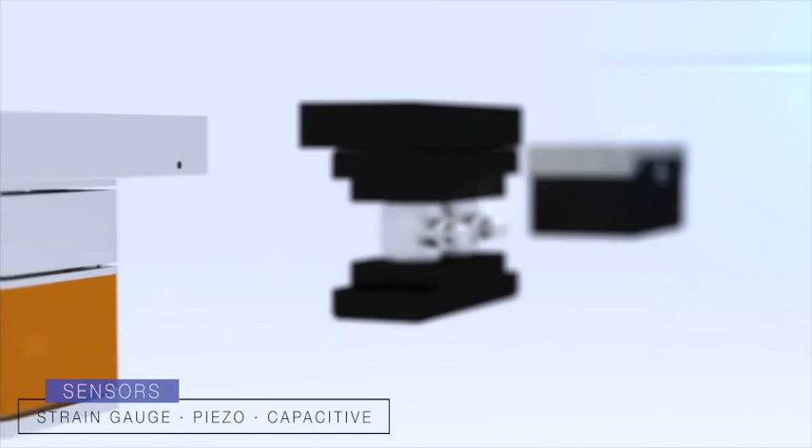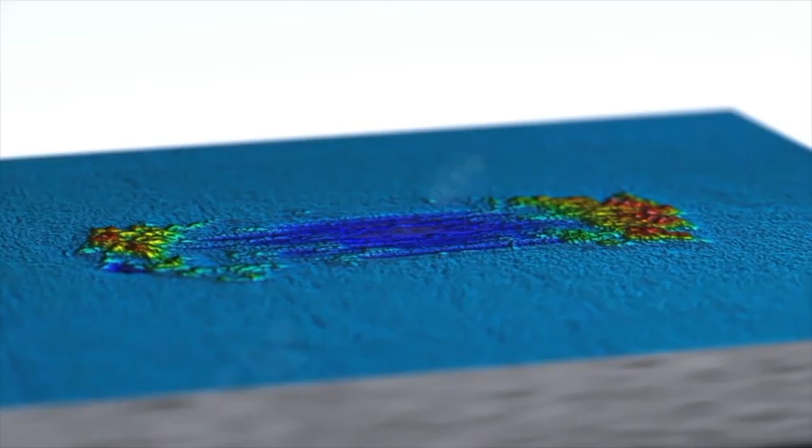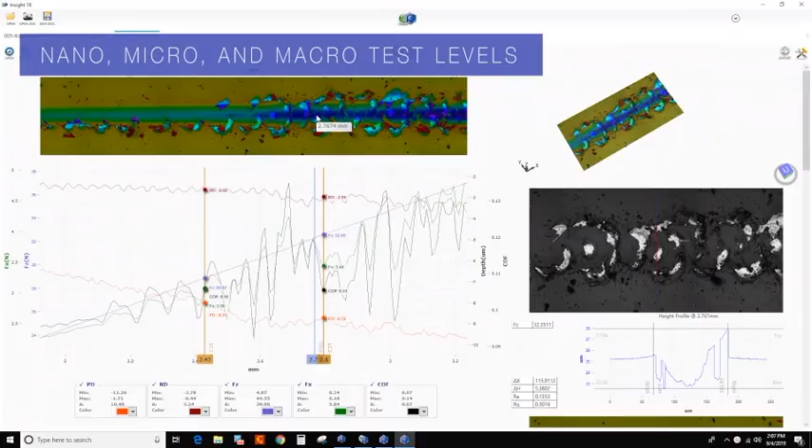The lambda profilometer, combined with the patented inline design, allows analysis of any surface, including glass, with ease. Because of its unique four imaging modes, the profilometer produces 3D information by creating sub-nanometer surface images automatically. A fully automated and simple software interface integrates the data, enabling researchers to design and conduct tests at nano, micro, and macro levels. To simulate real-life scenarios, the tribometer comes with several environmental control options allowing testing from -120 to 1200 degrees Celsius. These interchangeable chambers are skilled in evaluating high pressure, vacuum, humidity, salt spray, and tribocorrosion conditions.

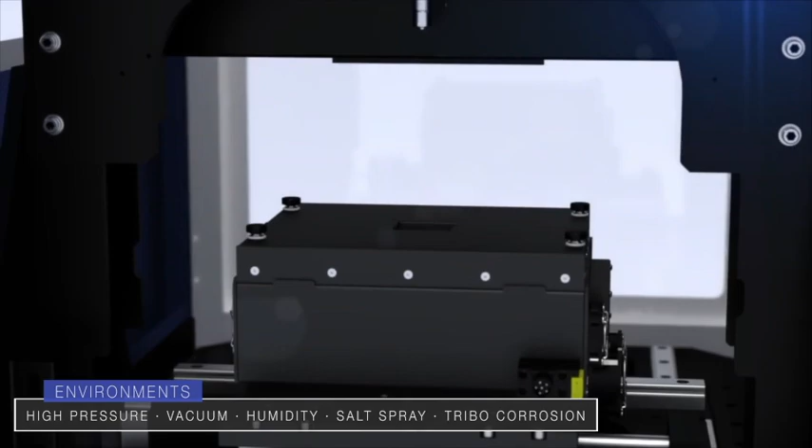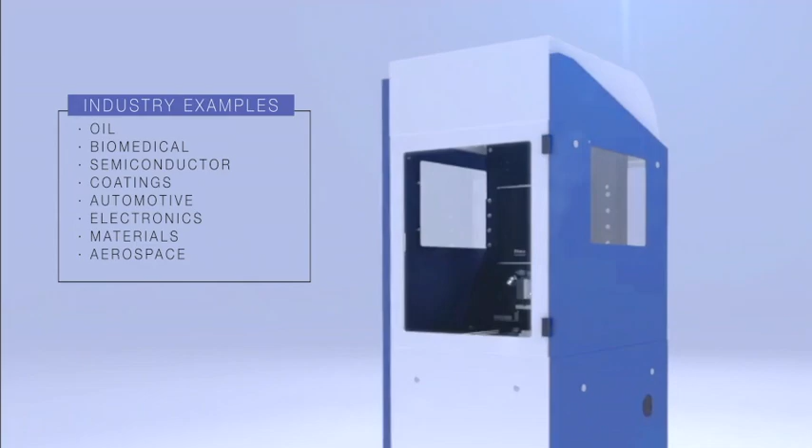Due to its multiple possible configurations, the MFT 5000 is used extensively across a wide range of industries, including oil, biomedical, semiconductor, coatings, automotive, electronics, materials, aerospace, and many more. On this platform, all types of tribology tests are possible. Rtec Instruments, leading innovation in tribology and surface test instrumentation.